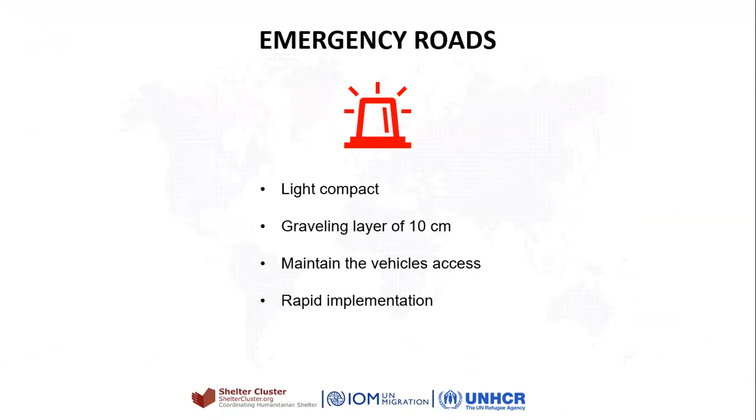We can avoid the fast deterioration of the emergency road, if possible without causing excess cost on the budget, by having a small drainage, because, as we said in the previous workshop, water is the main factor that destroys the road. The road is very lightly compacted; it doesn't have the necessary elements to protect it, like drainage or any topographical or hydrological survey. It's just a road we want to go through.

So if we can do a small drainage on both sides to protect it, it might last a little bit longer. The 2-3 months can be 6 months, depending on the situation: how often the road will be used, and also the season in which we implement it. If it's winter, it might stand only 1 month, maybe only 2 weeks. So we consider all these things on the spot, depending on the location.

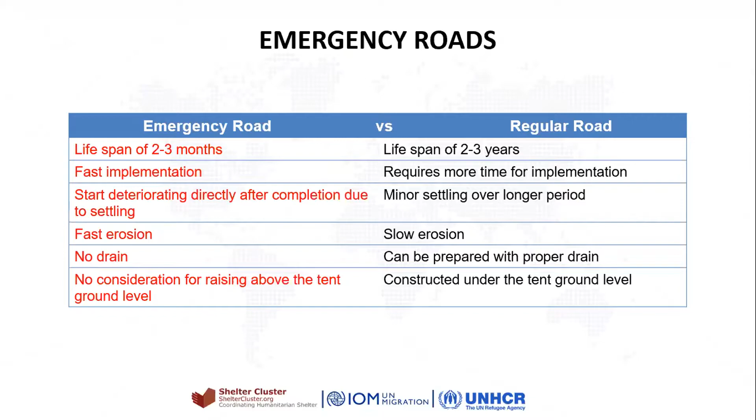Now, because we want to enter inside the location and we don't want the road to cause issues within the camp, we keep it very low. Compared to the regular road, which has all the elements we take into consideration, where we care about the part outside the camp but also do proper planning for the part of the road inside the camp. This was a brief introduction to emergency roads.

I got some questions in previous months about various locations and how to do emergency roads in them. It varies extremely with the soil. It can be very cheap to implement, or more expensive, depending on the road. Now, I give the floor to Esref for the next topic, which is storm drainage.

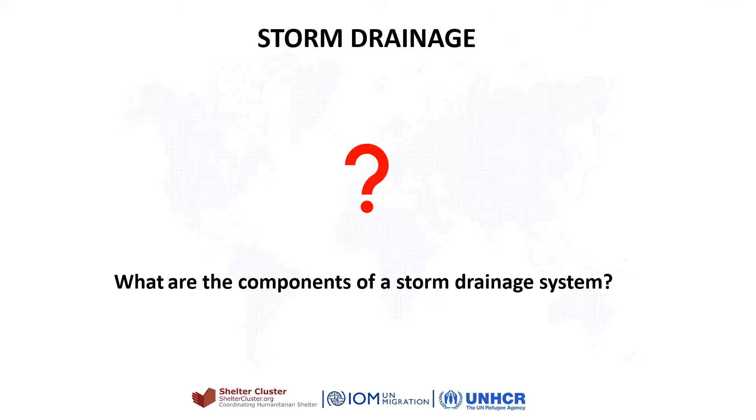Now, a definition of the main components of the storm drainage system. First of all, the drain lines. There are a lot of discussions and debates about open drain lines or closed drain lines. Some of our colleagues prefer the closed ones, and other colleagues prefer the open drain lines. And of course, there are advantages and disadvantages for each one of them.

So of course, the floor is yours if you'd like to comment on this. The advantages of open drain lines is that, since it is open, it is easier to drain the water. However, the closed lines can be combined with sewage.

Regarding the disadvantages of open drain lines, they make movement difficult in some areas or for vehicles. But for the closed ones, if it is closed in a certain place, it is going to be a little bit difficult to do maintenance work, and the cost implications are going to be higher. And it's not going to be effective if there is

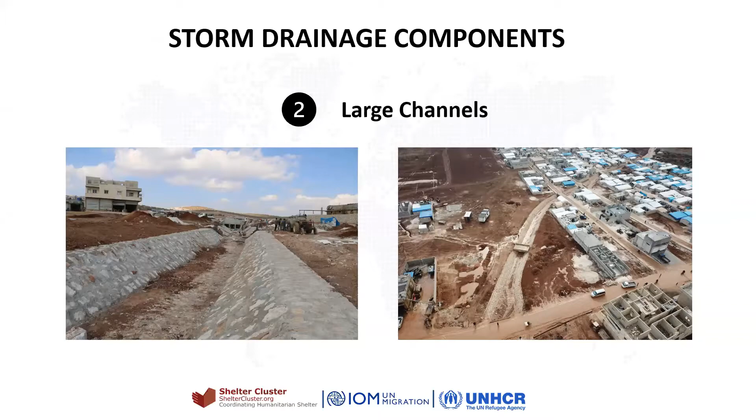However, when it comes to large channels, there is a certain line which is connecting with the camps, like in the camp in Asana, where the normal water stream was connecting with the camp. So a certain stream should be allocated in order for the water to be able to go through it.

Yeah, there is a question from Khaled. Sorry to interrupt you. Khaled wants to say something.

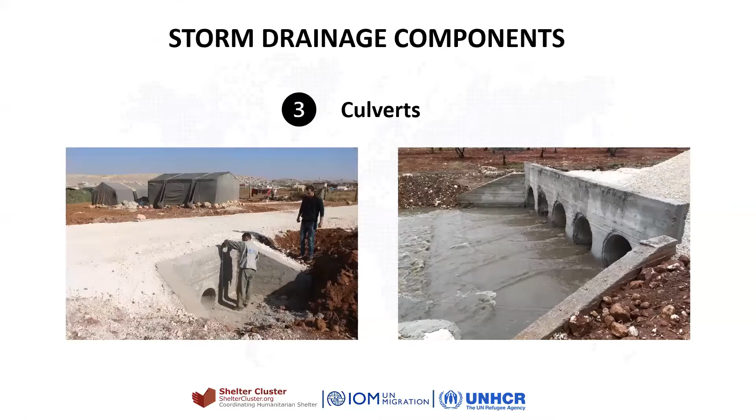Hello everyone. I have a question, more like a comment about the work that we did when it comes to differentiating between closed drain lines and open drain lines. Regarding the closed ones, there should be certain requirements and conditions that need to be fulfilled. When you want to build a sewage system and you have a nearby water stream, you have to design it accordingly. I am sorry for the interruption.

Can you hear me? Yes, I can hear you. I am interpreting. Yes, Khaled has a question, but at the same time in the Arabic channel, we are continuing the presentation. I am interpreting his question on the English channel. Okay. Thank you.

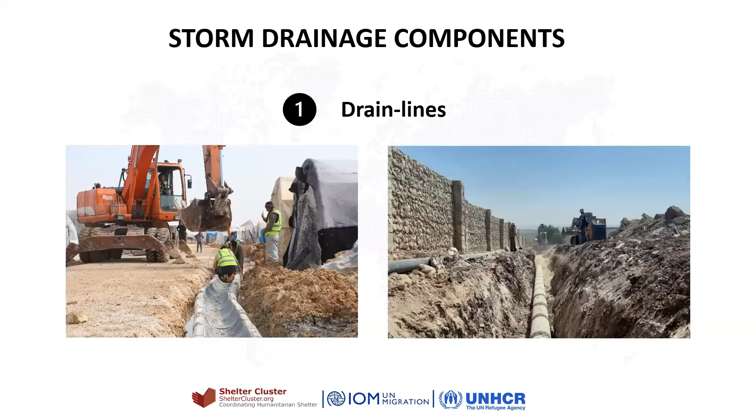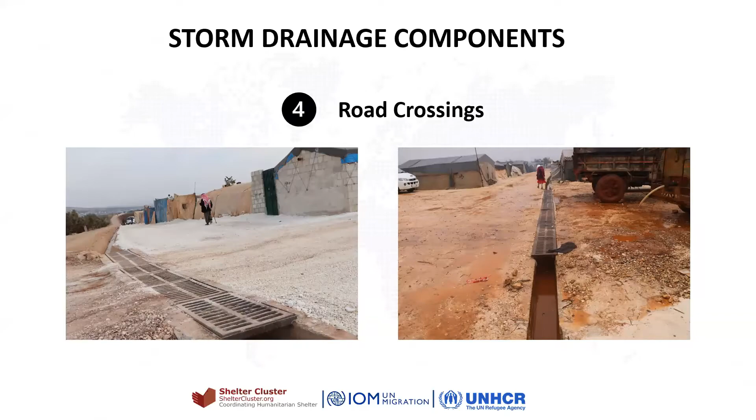However, our goal is to show you all the cases, to show you both options and to discuss the advantages and disadvantages, and to convey these findings to the engineering team on the ground. Regarding the discussion about storm drainage, this was only in brief, in order to emphasize the importance of this component. Now I'm going to give the floor to Mr. Abdulkarim, and he can continue the presentation and answer the questions that he was asked.

Hello, everyone. Last time we explained a little bit about the considerations of implementation when it comes to road construction, and now we're going to talk about the challenges that we face during implementation of road construction and open channels in the camp in northern Syria. The first challenge is that the roads are very narrow inside the camp. Sometimes it is so narrow that it's not allowing the vehicles to pass.

So my recommendation is that we shouldn't compromise the minimum of road construction. We shouldn't compromise the machines that are used during the construction. We used to use graders, for example. We need to remove some tents. We have to try to make the road wider, minimum 5.5 meters. So we have to try as much as we can to fulfill the minimum requirements for road construction when we face a narrow road.

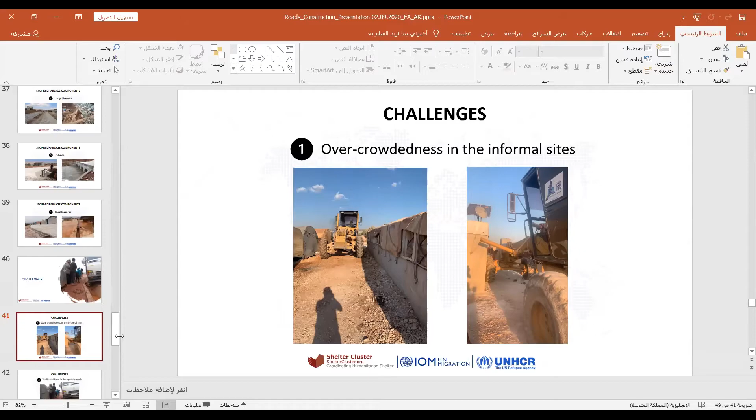Firstly, we have to ensure water drainage in this road, and we talked about this last time. Water is the biggest enemy of the roads sometimes, and we have to drain the water. In this narrow road, maybe we can build an open canal which is covered with blocks or anything else. We can build closed lines, but we shouldn't compromise water drainage when constructing roads.

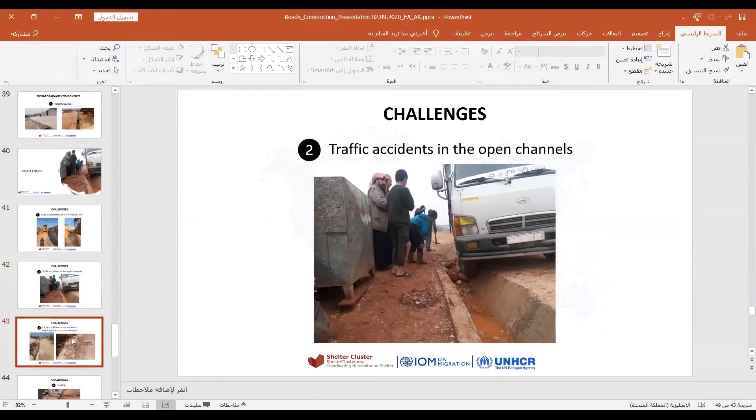And one more challenge that we face is traffic accidents in the open channels, as you can see in this picture. So we have to take these issues into consideration when we have a narrow road. We can close the channel where vehicles are passing, make it closed and covered in a way that can minimize the accidents.

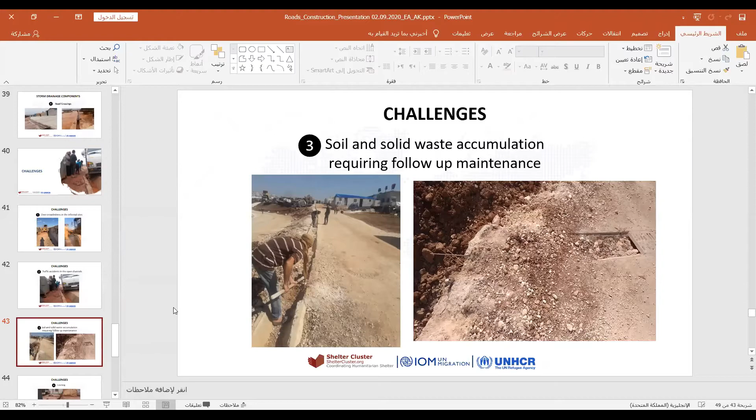Third, another challenge our colleagues mentioned is soil and solid waste accumulation. Here you need regular maintenance work. When winter comes and we have open channels, maintenance work should be conducted in order to guarantee that the water is being drained, and also looting, unfortunately. As you can see here, this channel is partially closed, and here I would like to talk about

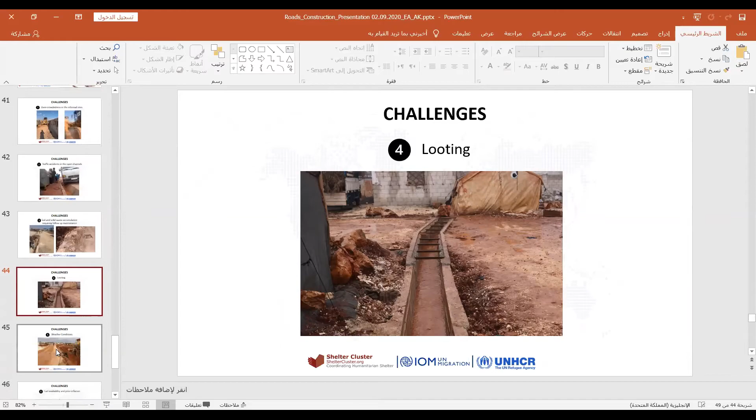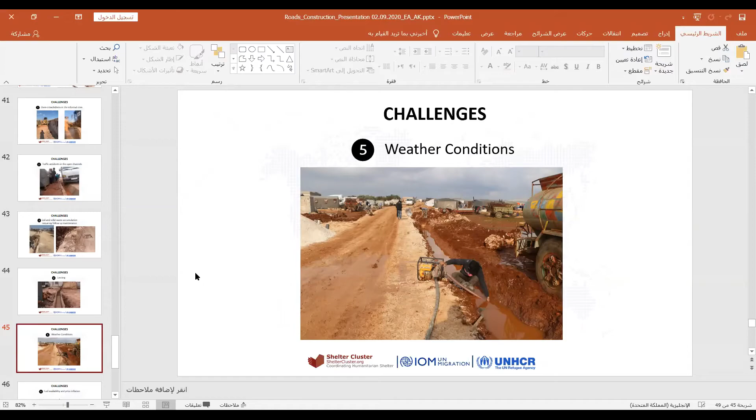So above those blocks, we can put aggregate. And we did this, actually. We did implement that, and it was a successful experience. And if you don't have blocks, you can use broken rocks in order to deal with the weather conditions.

And one more challenge that we face is the fuel availability and the price inflation during winter, because as we know, during winter there is a high demand on fuel, so this results in the lack of fuel, and eventually the prices go up, especially since we use heavy vehicles during road construction, and they consume a lot of fuel, so this could be a problem for us.

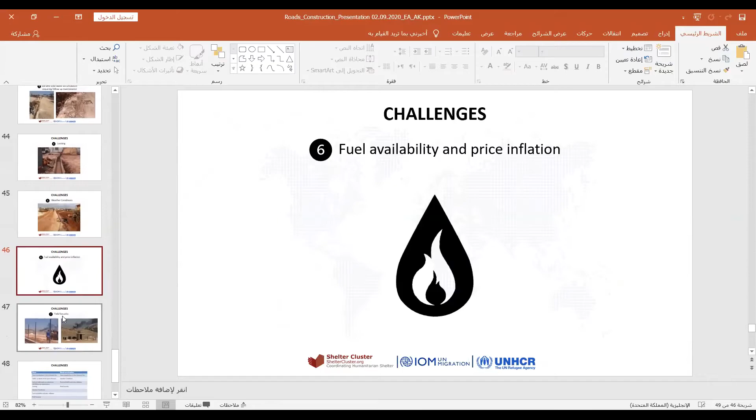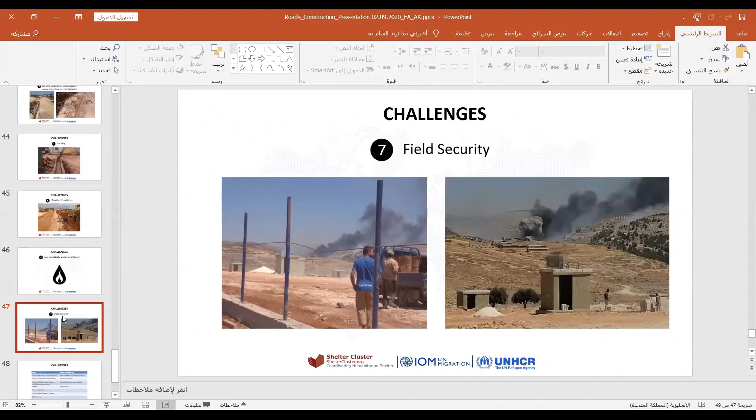One more challenge that we face is the field security. Of course, because of the situation in the area, this results sometimes in suspending the work. And here I'm talking about the front line.

And if we're talking about road construction and water drainage, we have four main challenges: overcrowdedness in the informal sites, weather conditions, fuel availability, and price inflation. Price inflation may not be only applicable to fuel, but it can be applicable to other materials as well. And in addition, field security.

But regarding drains, we have 7 challenges that we face. Overcrowdedness in the informal sites, as we mentioned, when we have narrow roads, and the second challenge is traffic accidents in the open channels. The third, soil and solid waste accumulation and follow-up maintenance. Fourth, looting, like stealing some of the materials, weather conditions, fuel availability and price inflation, and finally field security. This is in brief, of course, and these are the challenges that we face during the implementation of road construction or channels.

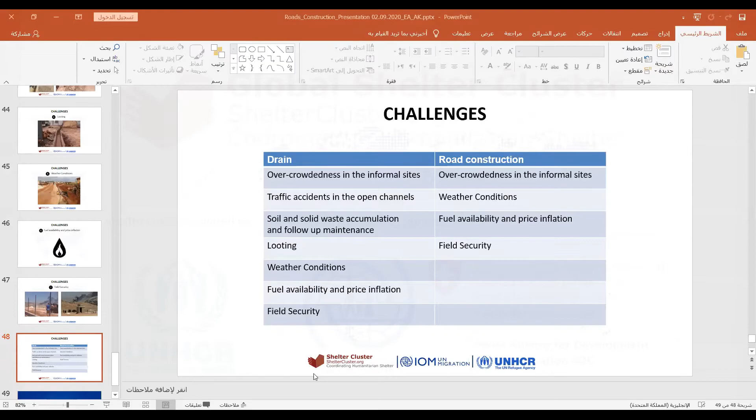Even if we face this challenge, we should not compromise the minimum criteria when implementing the project. Yes, I agree with you. However, the budget of the project is not reflecting the reality. So when you have $2,000 for a certain number of square meters, then we have a limited space to work in. You have different layers that need to be made. You have minimum criteria that need to be met.

You have 1 kilometer or 2 kilometers, but in reality, when you go to the camps in northern Syria and in IDP sites, when you have more than 2 kilometers, what can you do there? Yes, you are right. However, you are obliged to stay within budget. You can maybe construct fewer roads. But you're right, we shouldn't compromise the minimum requirements.

During this session, I think we have colleagues from IOM or people who are working in donor organizations. I think they need to be aware of this issue, and I am asking them to answer this concern. Yes, I am with you. This is one of the continuous debates that we face. However, frankly speaking, when we have an estimation for a certain project, when we have studies conducted, we've been working for a year on camp construction.

As Mr. Abdulkarim said, constructing a road costs between $20,000 to $25,000 per kilometer. Usually we have work being implemented for 2 and 3 kilometers. So approximately the average budget for a camp that has a population of 1,000 to 2,000 people.